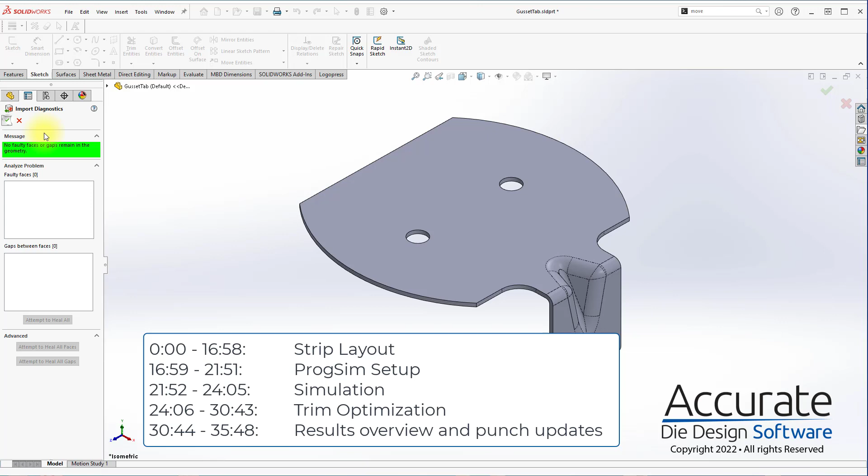Today we're going to create a strip layout for this part here, and we're going to use ProgSim to develop the cutting punches for it. I'll start by saving the part.

We will begin by taking the gusset out entirely. We are just going to use the ProgSim tool's automatic blank development, or the trim optimization, to create the punches for us.

All right, we can go back and name our station marks now.

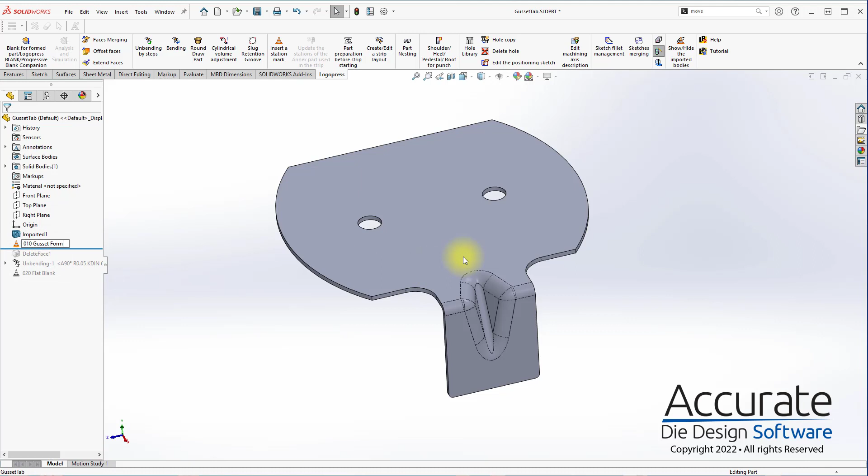Save, and we'll run part preparation. We'll tell it that the bottom side is die side, and that we're going to use this line, the back edge, the center of which to be the origin. Just going to create some reference geometry.

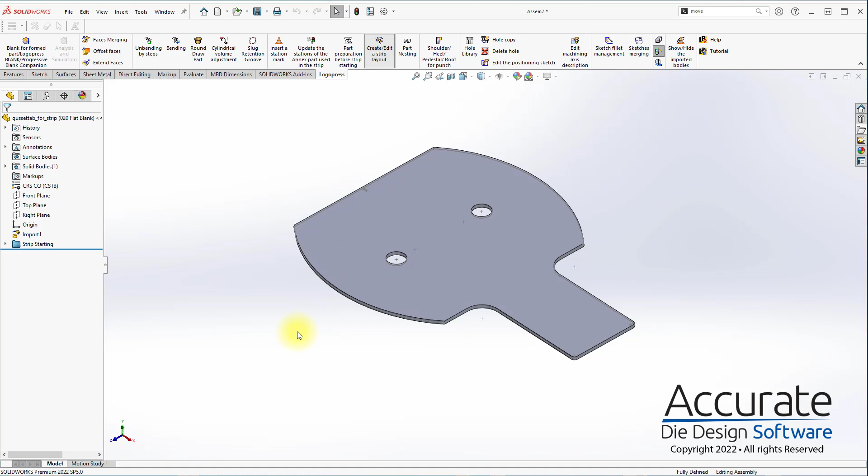And we can run the create/edit strip layout command. It needs a job number, and we need to name the strip itself.

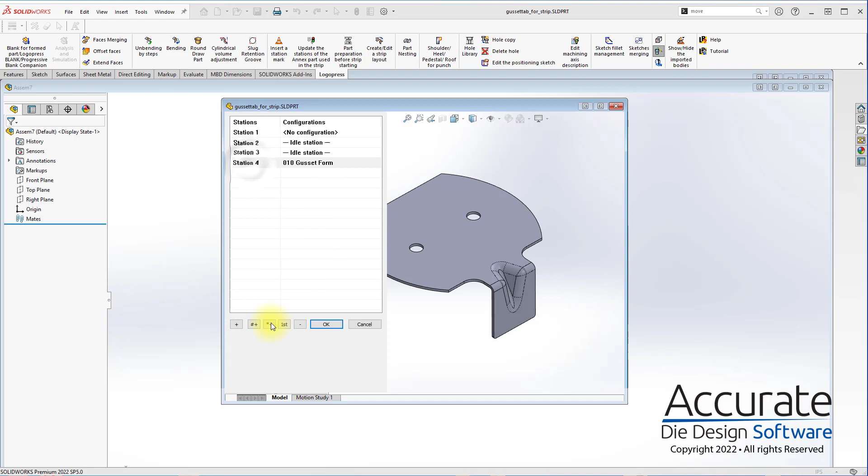We run a single-out, just going to run right to left. It puts in the two configurations that we add, so we're going to have a flat, then two more flats, then our form, and another one. So a total of 5 stations. And we'll save that.

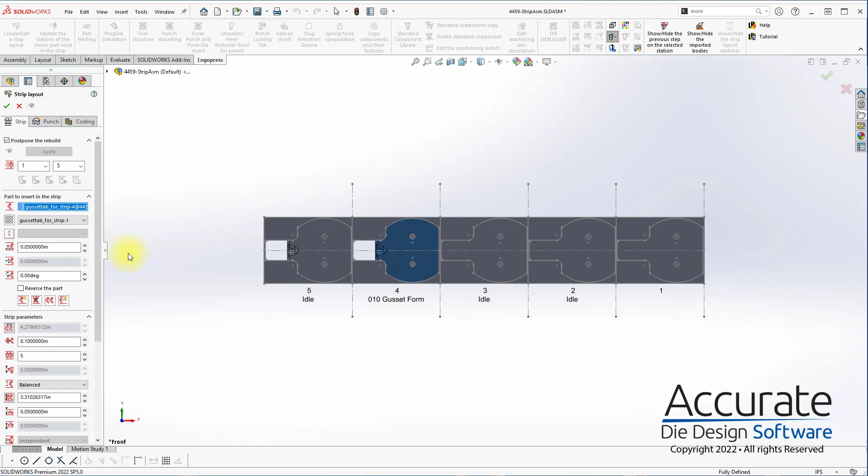Now we're ready to arrange our part. I'll rotate it 90 degrees.

We can adjust the spacing between parts. Give it 150 thousandths if we want, or we could just type in an actual value. Same for the strip width it gets. When it comes to material thickness, we could put in a different value, or just type in directly. I'm also going to nudge this right off the edge just a little bit here, and I will hit apply.

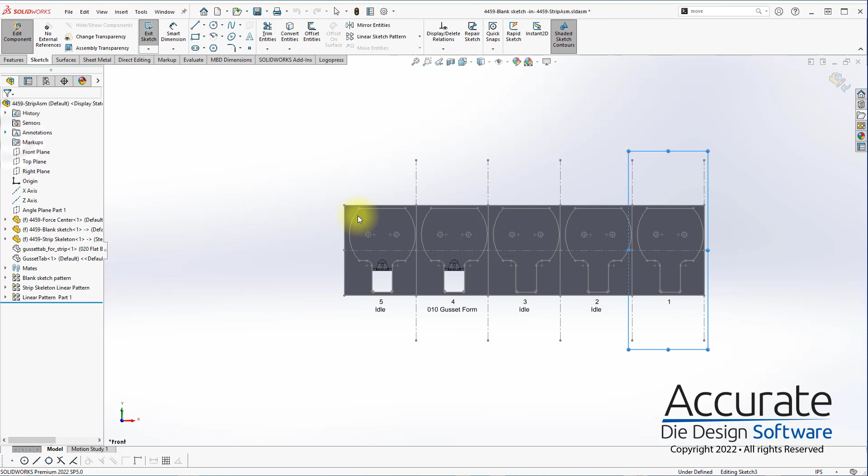Now we're ready to start putting in our punches. I'll start with our punches for pilots. It's asking for points where we want the pilot, but we don't have it where we want it yet, so I'm going to add a sketch as a reference.

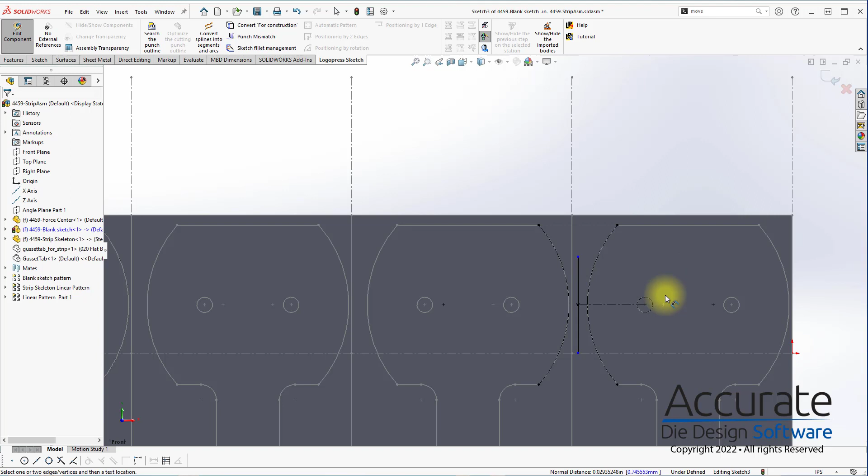I'm going to start by converting some reference geometry here, then we're going to go center of that, and center of that, and I'm going to do a midpoint line out from there. That'll be coincident. This will be... oops. There we go. Now we've got a reference.

We are going to put pilots here, and they are going to be 0.377 inch diameter. Going to hit OK, and it will add those in for us.

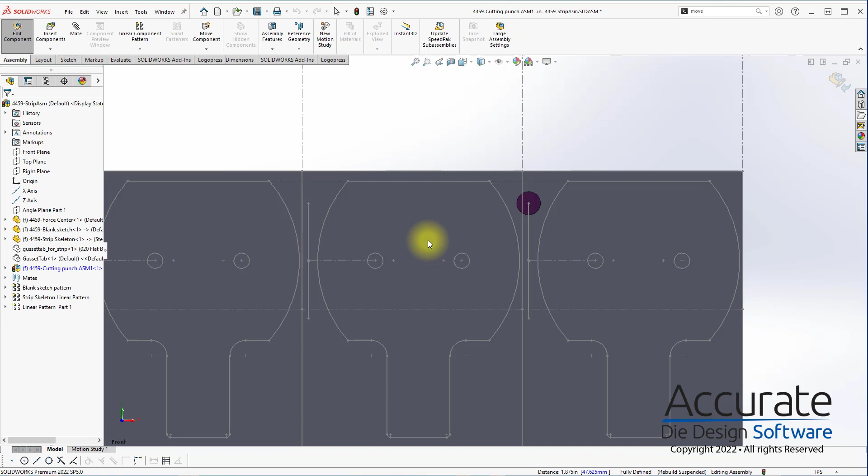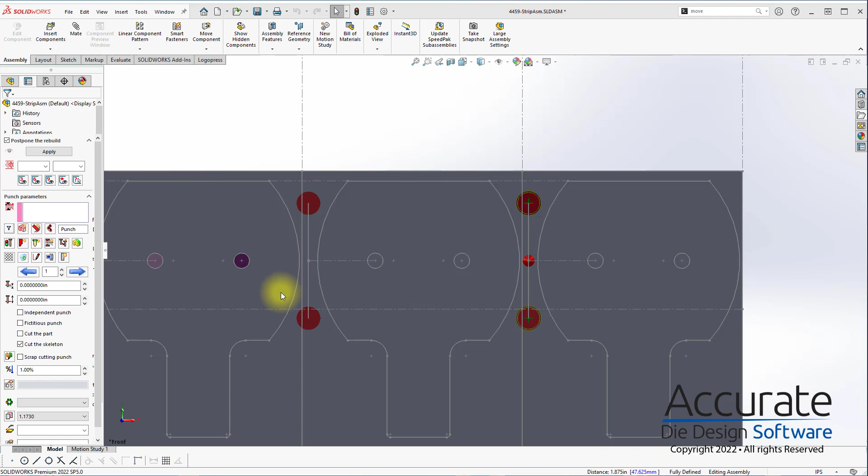Going to add these interior cutting punches here, in the 3rd station. Again, as we saw with the first one, it made an original punch and copied it into the 2nd location. It's going to do the same for these, so that way it'll be mounted together later in our tool, and also shows up as a quantity of 2 in the bill of materials. You can see that here with the colors, the dark original and the light copied.

Going to move on to our next punch here. Throw a rectangle about what we want to do, and then we will make it coincident. Then we can use the search punch outline sketch, it's going to find that whole area. I don't want this redundant sketch here though, so I'm going to drag this back and then back onto it.

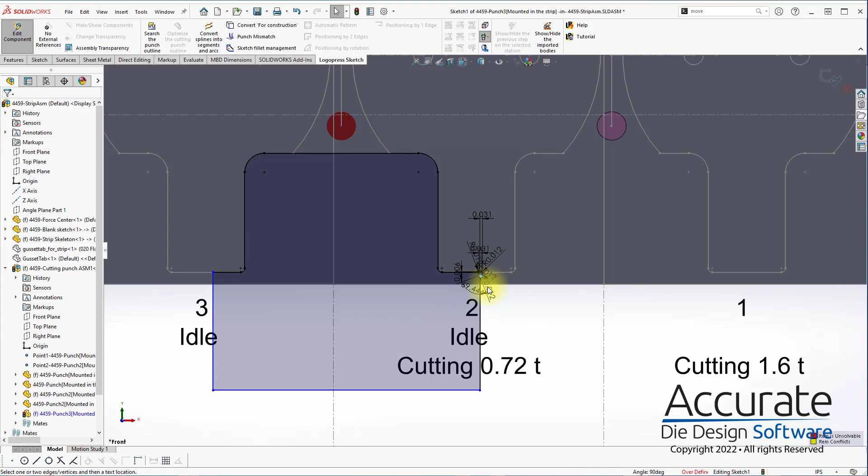Next thing we want is a mismatch here, French stop, the cutting side and the reference side. It puts all that in for us automatically. We want our radius on this end, and 100 thou on the back. And add some reference geometry here.

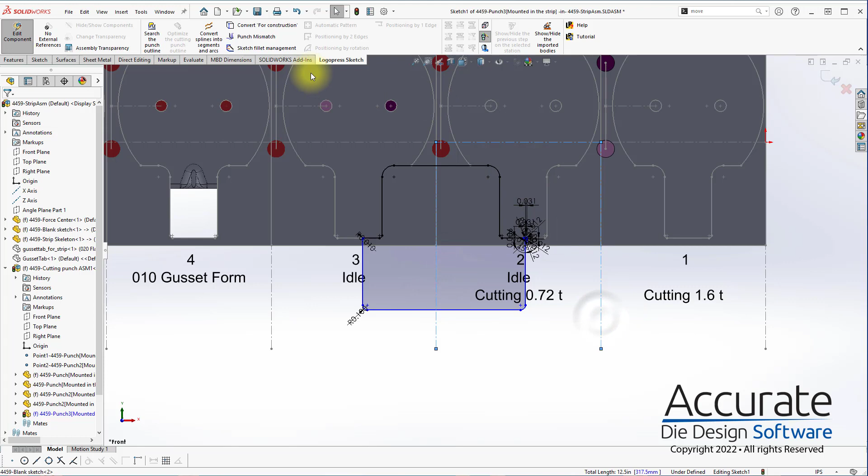That's one punch down. I'll get another one going here in a second.

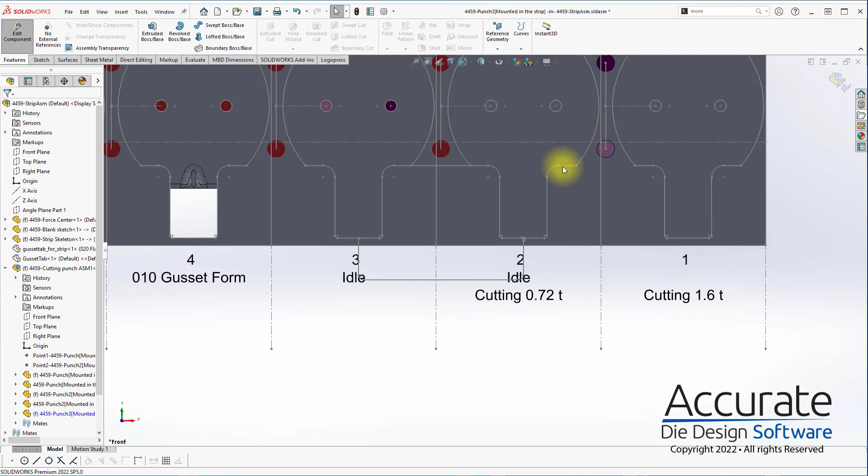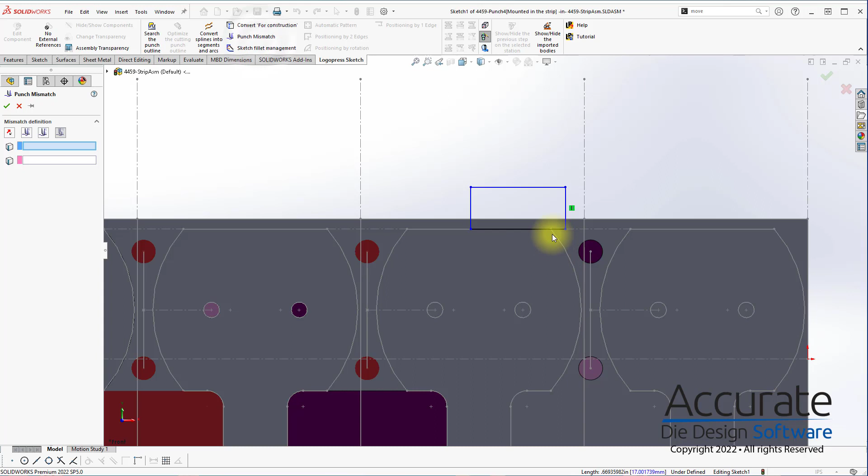Just saying, draw a rectangle around the edge we want to capture, search the punch outline, and then we can modify, drag that out, do our mismatch. Put 100 thou on the back since it's already 100, and we'll add some more reference geometry.

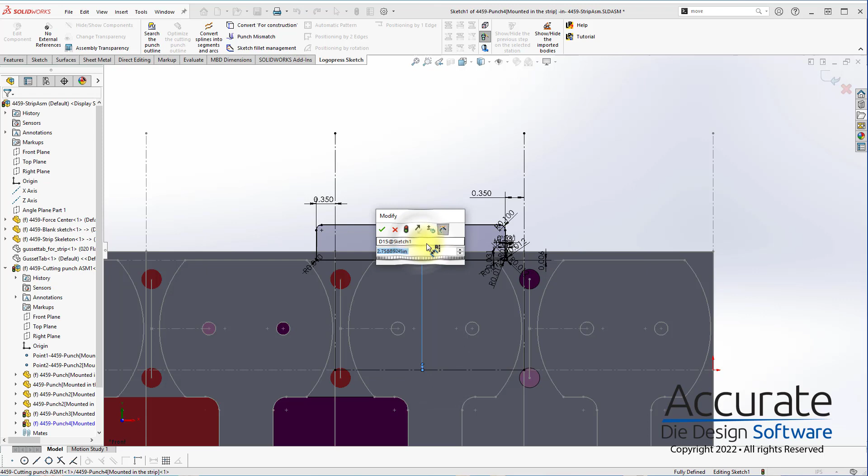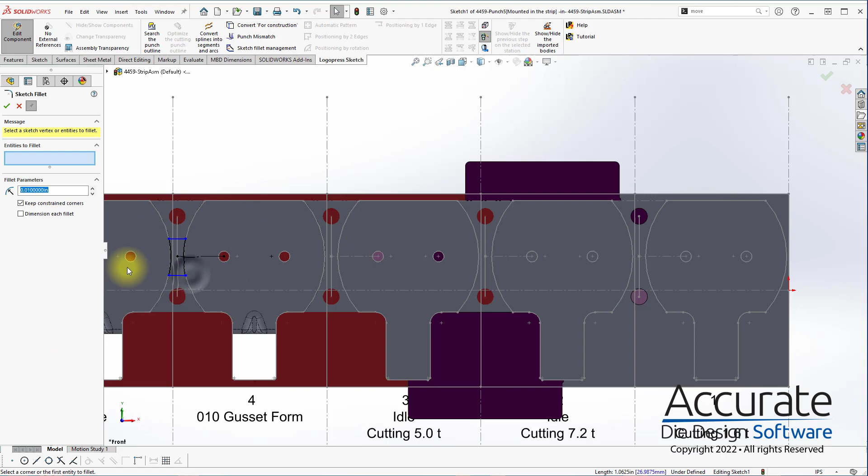And one last cutoff punch here. Make this symmetric, I'll add a dimension. There we go.

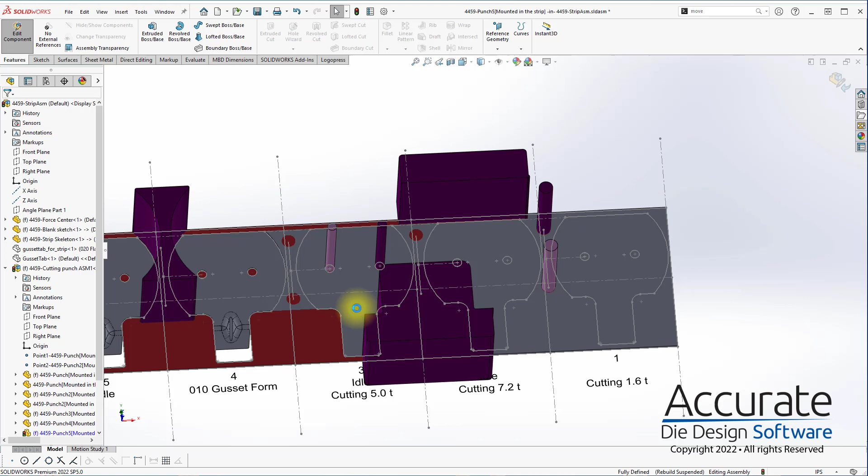You can see on the red preview here that our mismatches are lining up. All right, we've got all our cutting done. We're going to go ahead and apply.

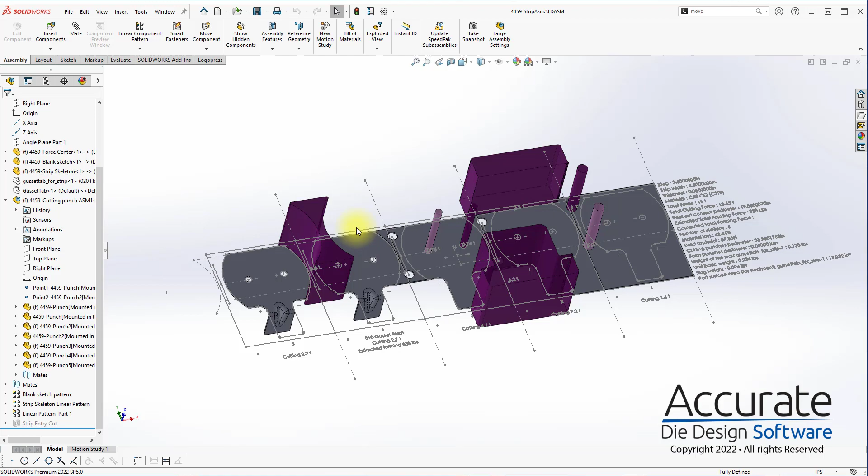Alrighty, we'll go ahead and save. Now we're going to start working on some more punches here. Show at the bottom side.

We're going to pick the edge that we want first, and then we're going to pick everything else. And then we're going to draw a sketch.

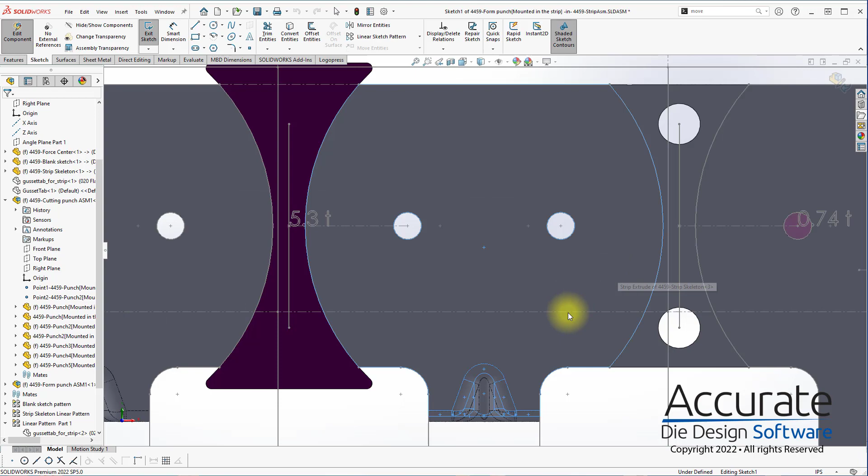I want to use this edge as a reference, but I don't want to maintain that type of reference, so I'm going to make that link first, but then I'm going to come in and use my reference geometry here. And before that can move, I'm going to stick a distance on there. So that is now essentially the same as being collinear, but it won't update with it if it ever moves. So it just happens to be on edge right now.

I'm going to keep this within the width of this here. There we go. Oops.

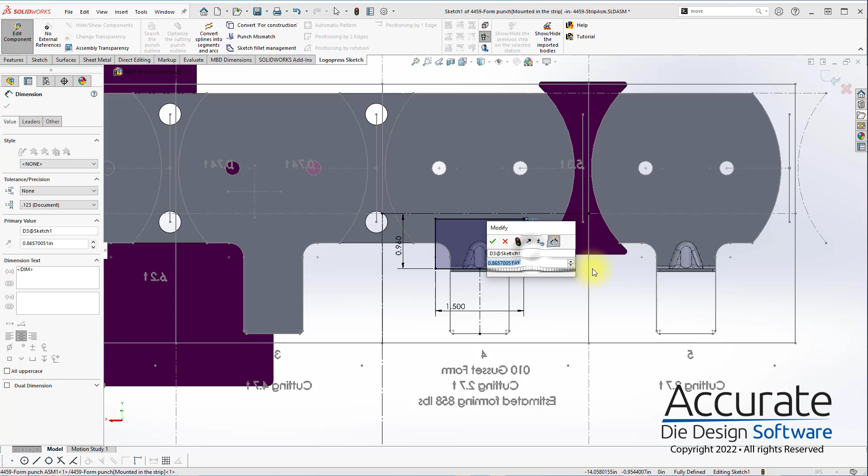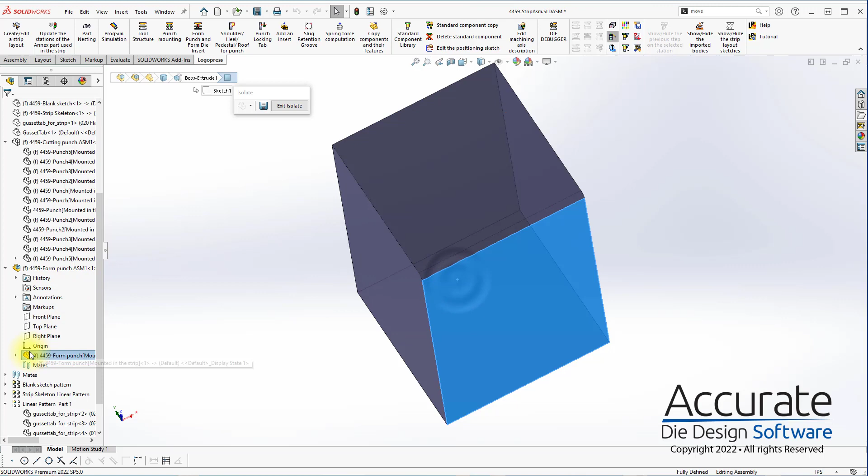All right, so this is going to make our punch here, but as you will see, it has not cut the gusset at all. So I'm going to edit the punch, still in the context here. Since I selected the surface, they're all on there, so I'm going to use that surface body with the cut with surface command and cut that off. And now we have a gusset.

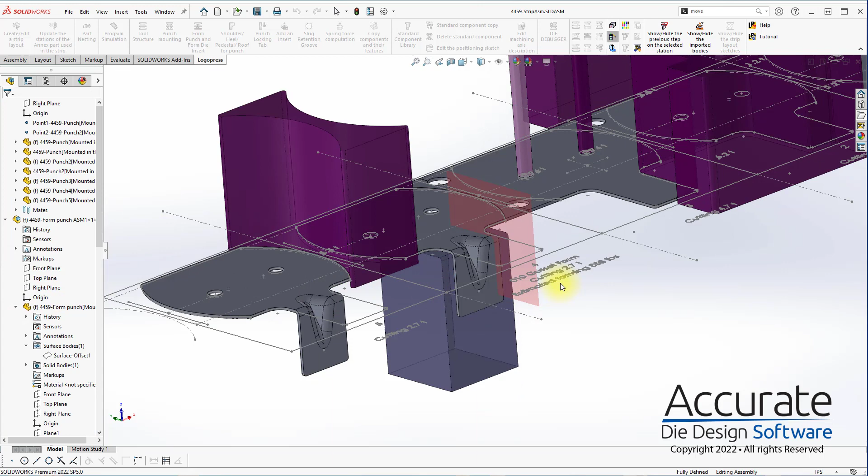Do more or less the same thing from the top side here. We're going to pick one edge to be our bend radius as a 2D punch, and then we're going to pick all of them as our cutting surfaces. And then we're going to draw our outline again. Get our reference to center our sub.

And one last construction. I want.

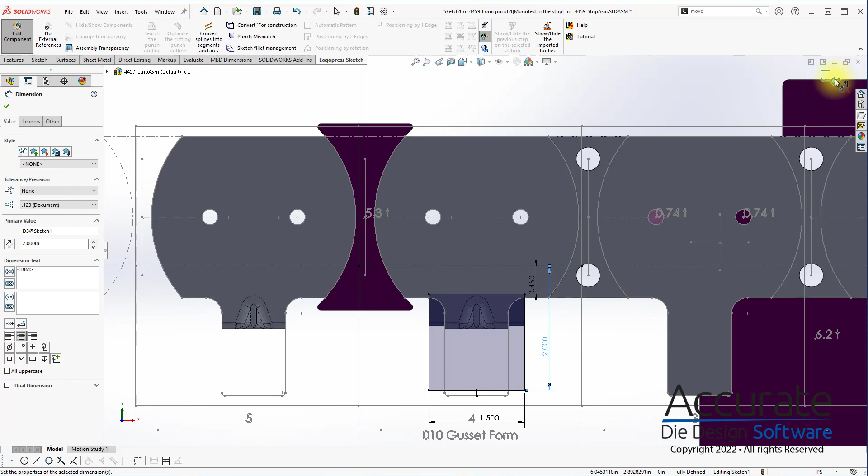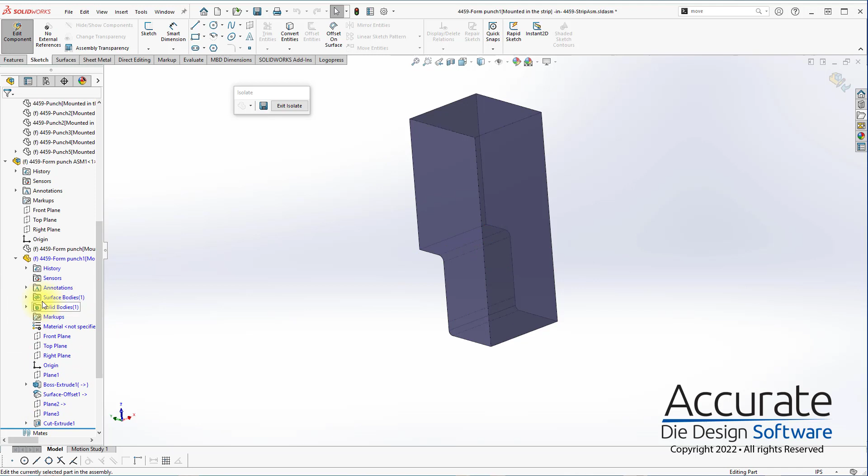So again, this is creating just a basic 2D white punch without any gusset on it, and then we are going to edit it and use the surface that is there. This time the material is not there, so we need to add material. So what we're going to do is sketch on the top of the part and draw a rectangle.

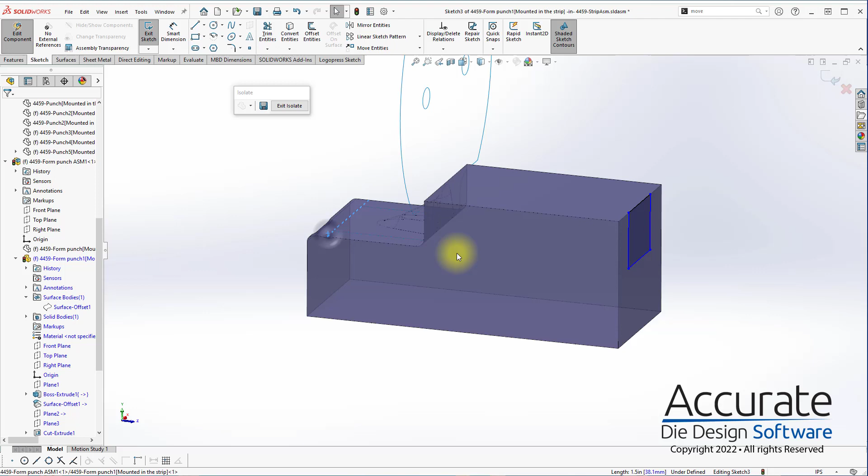I'm going to make this edge coincident, and just make sure it's wide enough for those gusset faces right here. I'm just kind of looking through and getting that in there. I could fix these or lock them down or something.

We're going to extrude up to surface. So we're going to pick that surface. Oops, we're going to go that way. Oops, that way, and go up to surface. Come in and grab this surface here.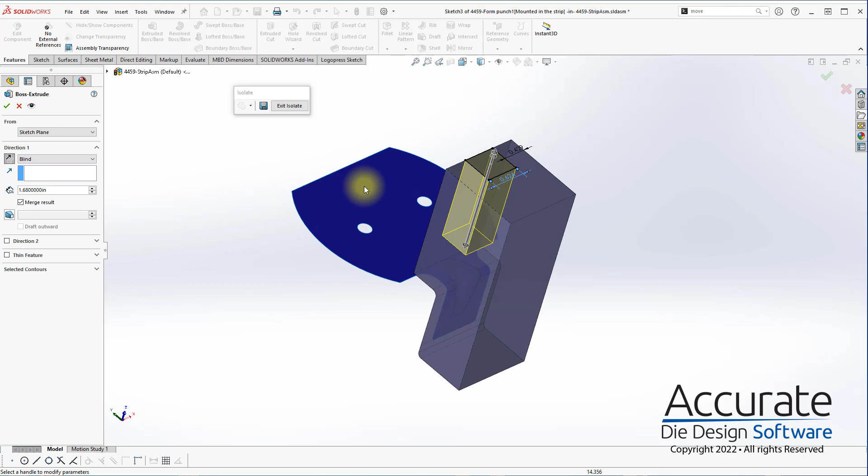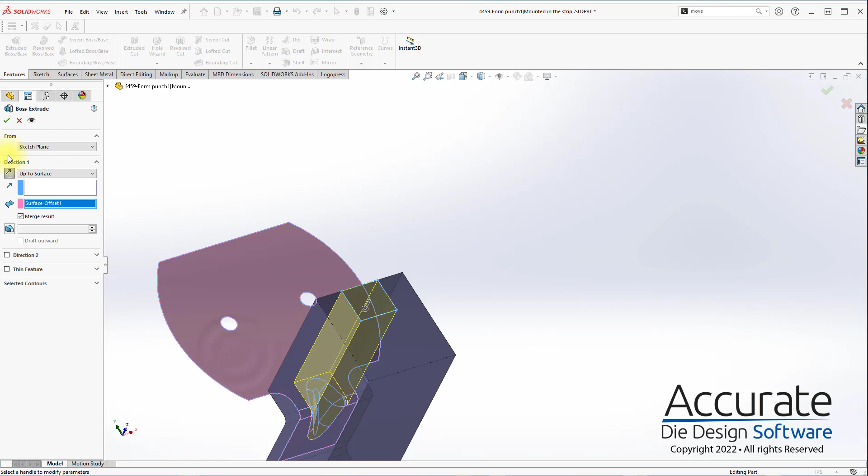Oh yeah, I can't do that in a strip context here, I always forget that. So I get out of this, exit isolate. And we take a sketch we created, we can extrude, we can do up to surface. There we go, and we can hide our surface again. There's our gusset.

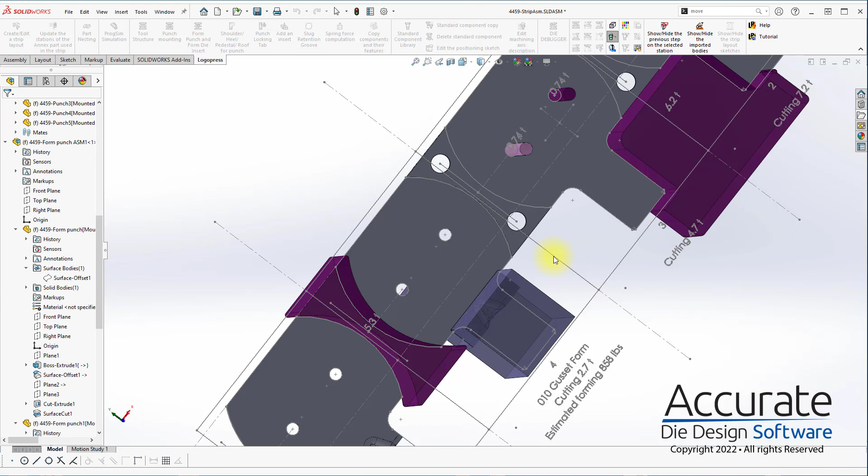And we're going to use the form punch command one last time to make our last piece of geometry, our pressure pad right here. And we just need it somewhere in here to hold this down for us.

All right, pressure pad. Done.

Oh, I was going to change these. You can go back in to edit these just so you know.

Just going to give it some color just so they're easier for picking them up for the die simulation here.

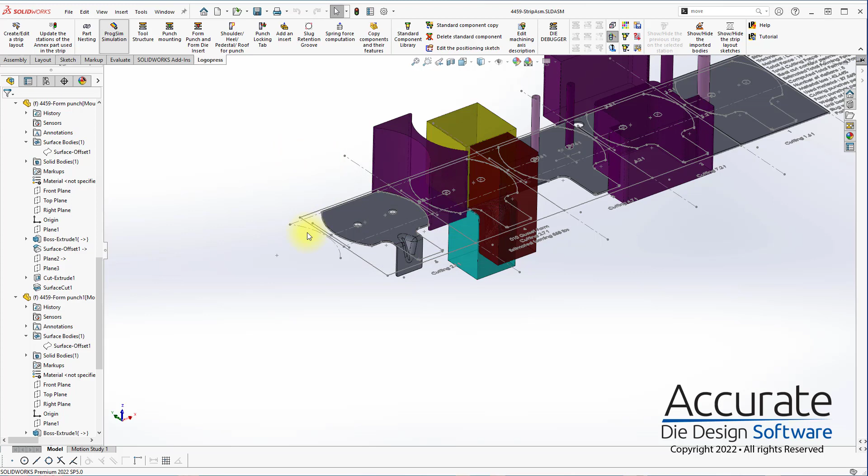Okay, we are ready to simulate. I open the ProgSim tool. It's going to start loading in a lot of the data here. It does pretty well at guessing what we want, but we still need to go through and double check that it has done what we wanted.

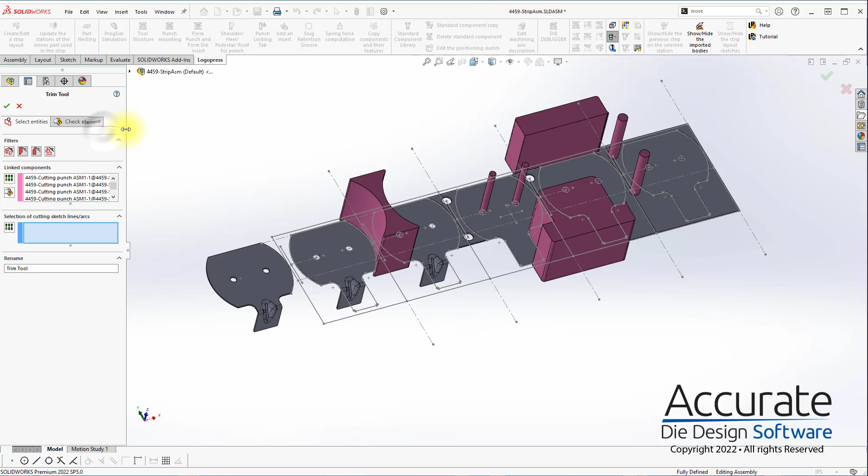Start with the trim tool. It's picked up all our punches. Show up in the check element, and we're good with that.

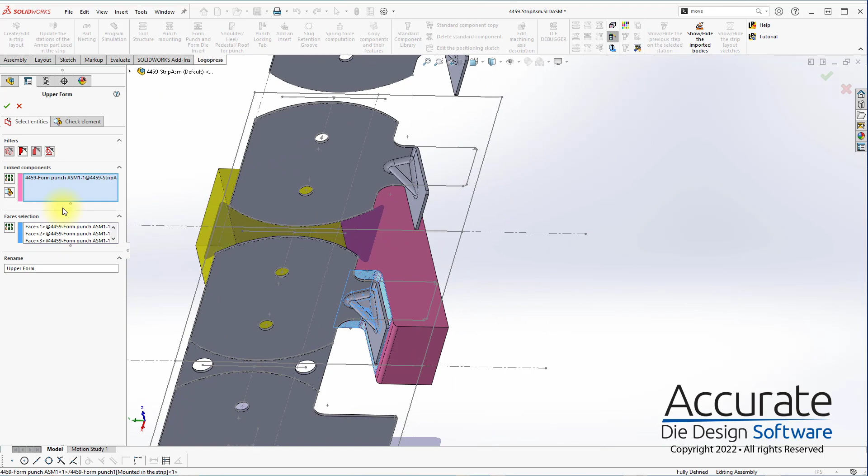Go back, move on down the list. Next one's the upper form. It's picked up both of these parts, I created them both with the form punch command. They're above the strip, so it makes sense. But we do not want our pressure pad to be a form tool. We are going to grab the last few faces down on the bottom here.

And you can check and look at what we got and see that it is indeed what we want.

Keep on going down, next is the upper lifter. Accept the name and then look normal to draw a big floating lifter across the top here. The only thing is we need to just watch out for the gusset, so really the only thing is just don't touch this. Other than that, nothing wrong with having more because it's just going to support more material and keep it nice for the simulation. We're on both sides of the center line, so we are good.

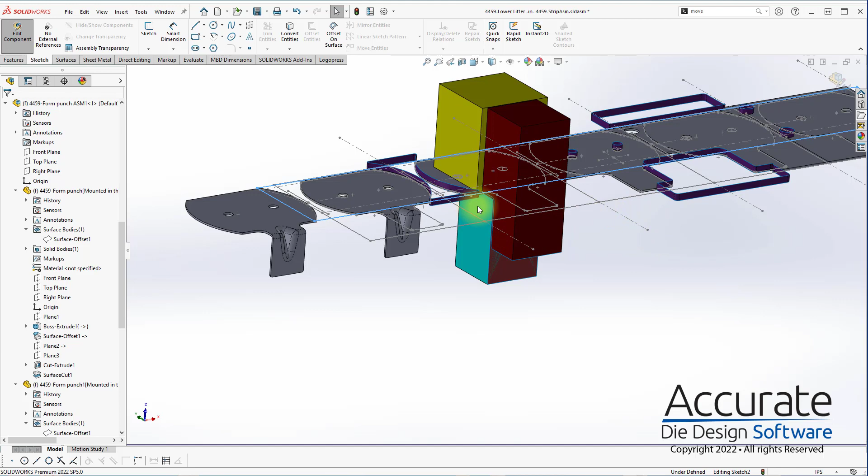Next is the lower form. It's picked up the lower form and its faces. Confirm, and we like it. The lower lifter is the same as the upper lifter, so we just made that and we know it's good.

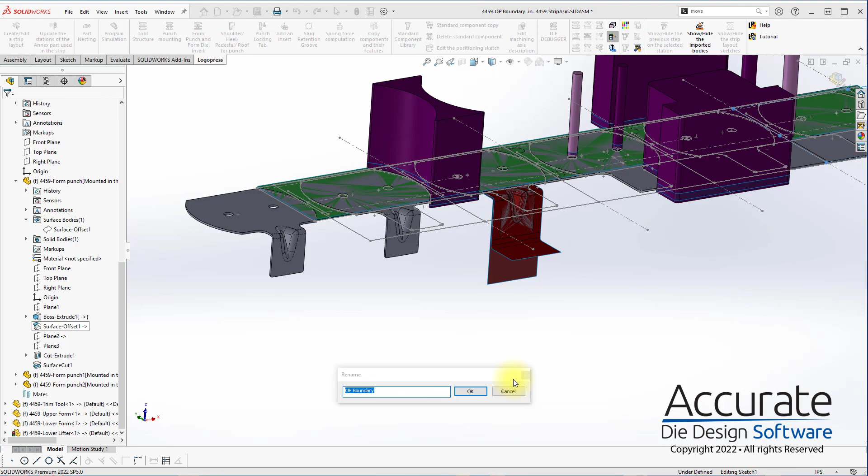Next is the OP boundary. Accept the name, and then look at the drawing. We're just trying to divide the part one from the next. What my goal here is to try and include some of the skeleton here. I need to go all the way out to the edge because this is going to define the shape of, or the width of, our material. But I'm going to come all the way into this center line here.

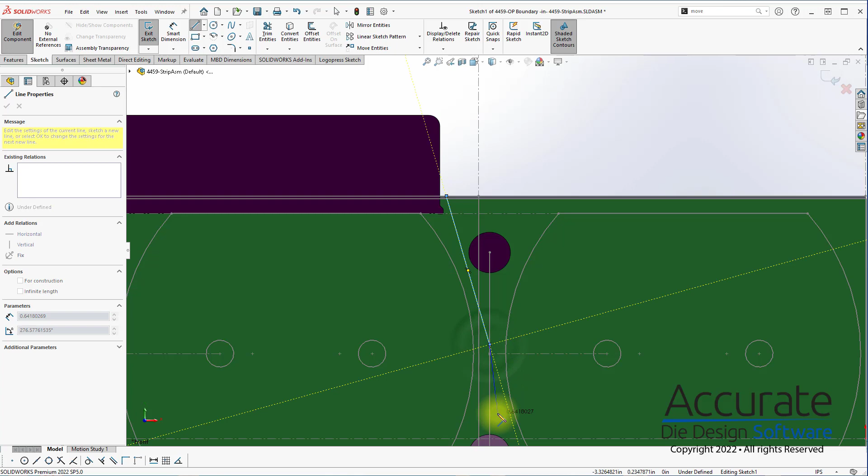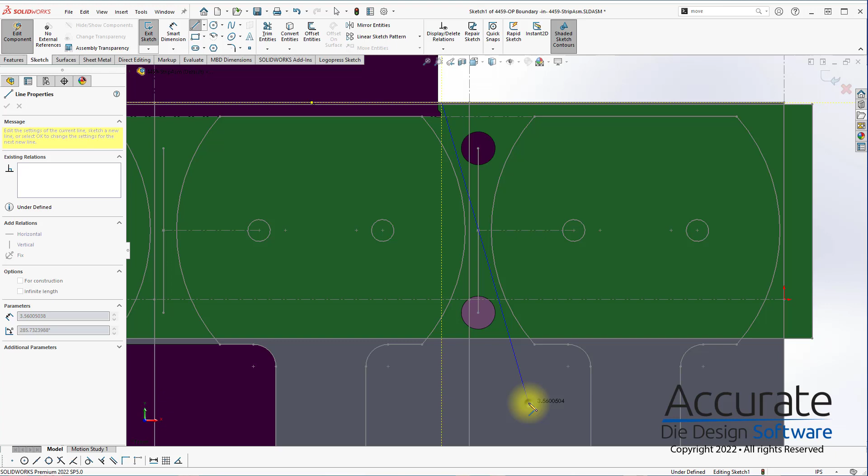And the goal, my only goal here is I'm trying to put one lifter or one pilot in one and one in the other. I think I can actually just come all the way across with this. Go away, or not. Close enough, there we go. So that's fully divided the part.

And I can draw that in any station, and now it's patterned it all the way down. Pick our pilot holes, I'm going to hold Control, pick the edges. It's going to pick up on the pattern of the edge until it gets recognized as a cutting punch, so I just do that for both of those, and it picks up the second one.

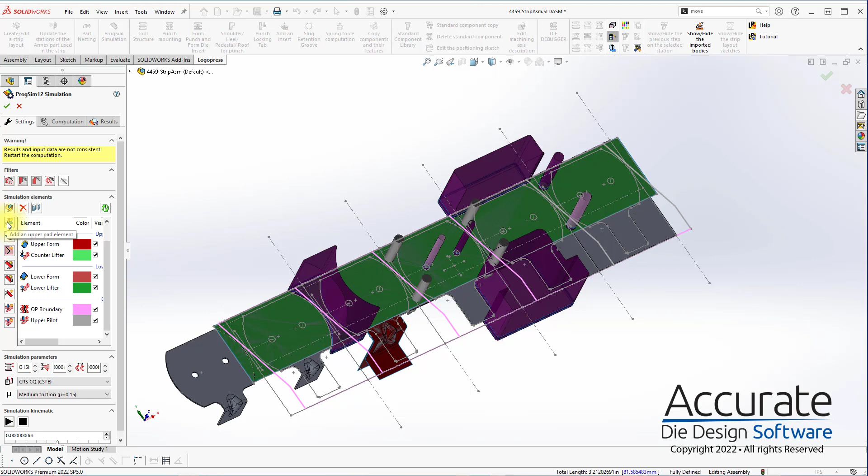And the last thing we need here is our pressure pad. I tell it this block did not pick up the face, I'm going to pick through the hole here. So I'll tell it there's 2 inches of stroke, initial force of 2,000 pounds, and hit confirm.

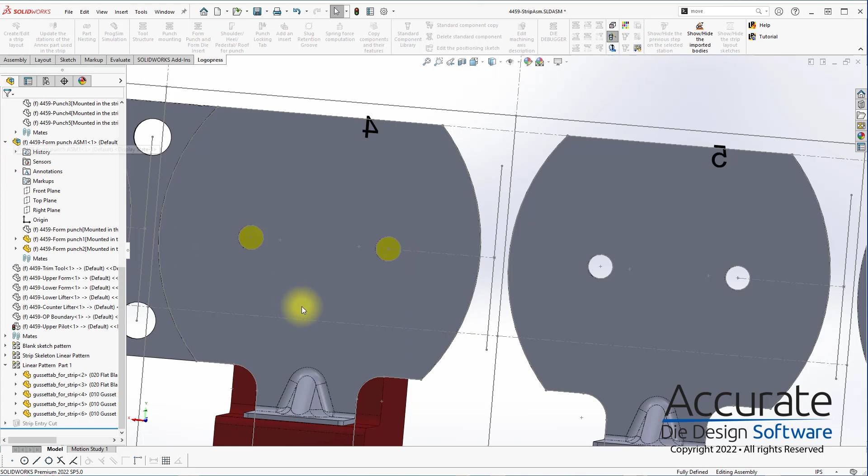We've got our basic strip stuff set up here. Go down to the bottom, get the rest of our stroke. The lifter is going to move the same as the pad, 2 inches, and we're going to make the lower lifter 2 inches as well, just for the sake of convenience. The overall stroke is going to be 8 inches.

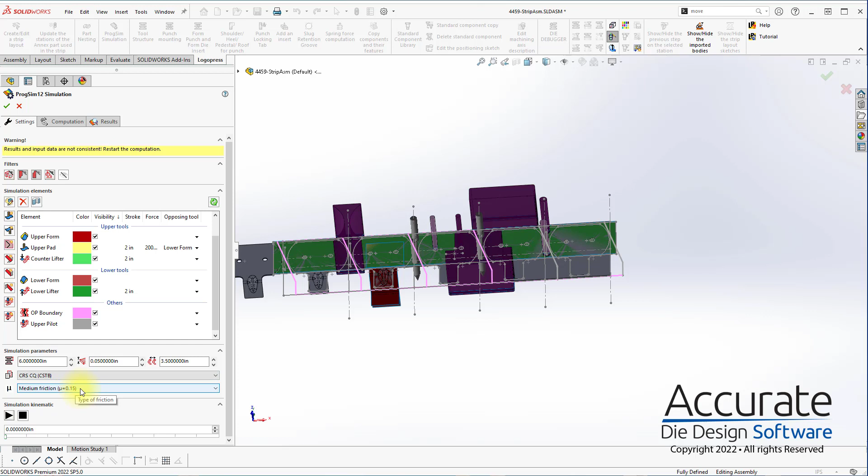No, we can make it even shorter, we can make it 6. Thickness of the part is indeed 50 thousandths, and the progression of the part is indeed 3.5. Got our cold roll material selected, and we're going to use the medium default friction. We can, from here, go ahead and hit compute to make sure that our simulation makes sense. And then once we know that it's working, we're going to set it up to optimize the cutting punches.

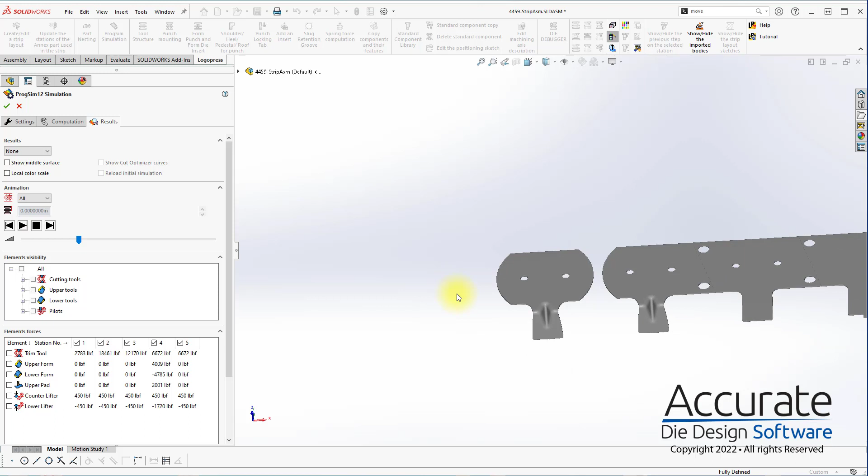All right, so simulation worked. So we're going to come over to the computation tab, and we are now going to ask it to run the cut optimizer.

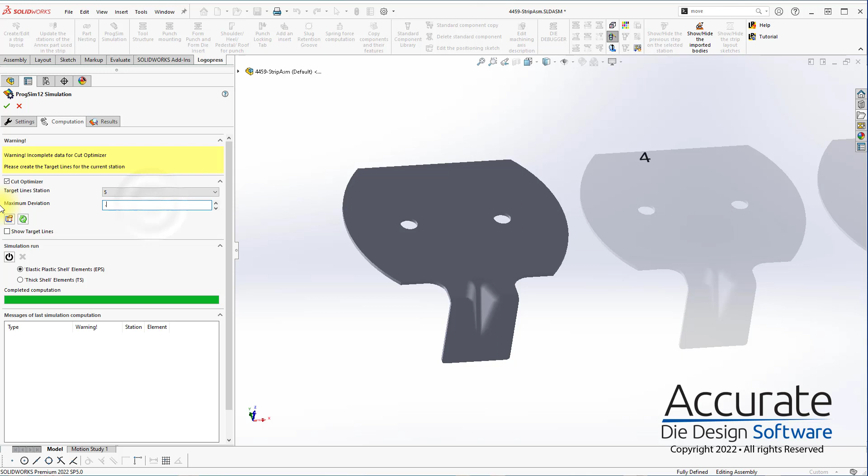Use this 5th tab here. We're going to ask it to go within 10 thousandths. It probably even goes closer. Let's ask for 7 thousandths. But we're not going to ask for it to optimize the whole part. We're just going to optimize the tab because the rest of it's being carried and it's being cut and not really being developed. So it's only this tab part that matters.

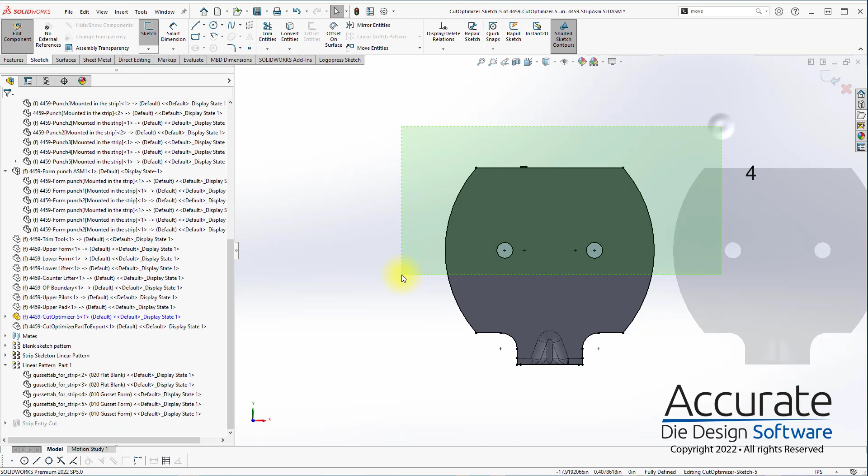So it's identified the outline. I'm going to create a sketch. I'm going to come in here and grab all this extra stuff, delete that. And then we're also going to drag this back from the edge a little bit, which helps the simulation. So now we've got the edge of the part defined here, and we're going to tell it please get within 7 thousandths of that. So we're going to go ahead and launch the computation again.

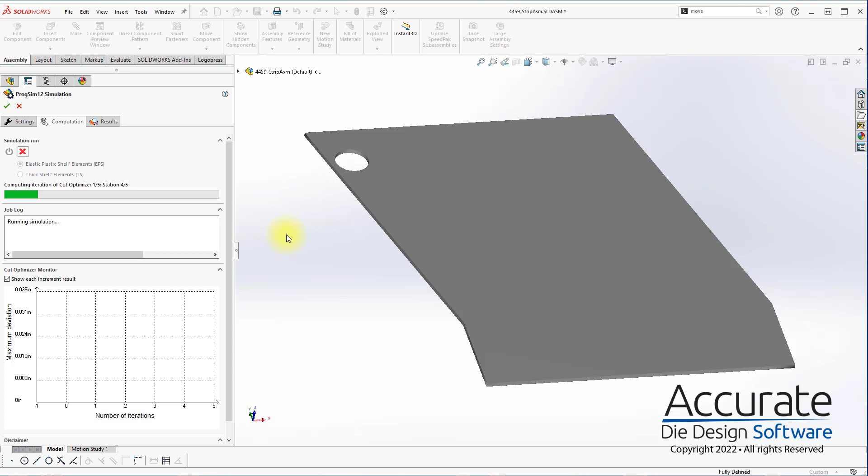Just run through basically the same simulation over again. It's going to compare to that line we gave it now.

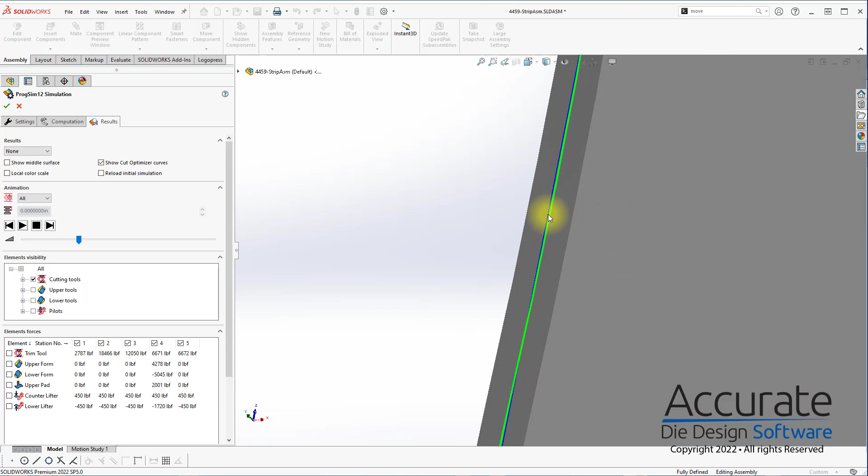Alrighty, so we can see the cutting punch that it has suggested, and given the green line here, we're now fully within 7 thousandths. Let me click on it. Maybe not. Anyhow...

So we can take a look at the formability if we like. It's indeed a formable part. Spring back here, got 6 thousandths worth of spring back.

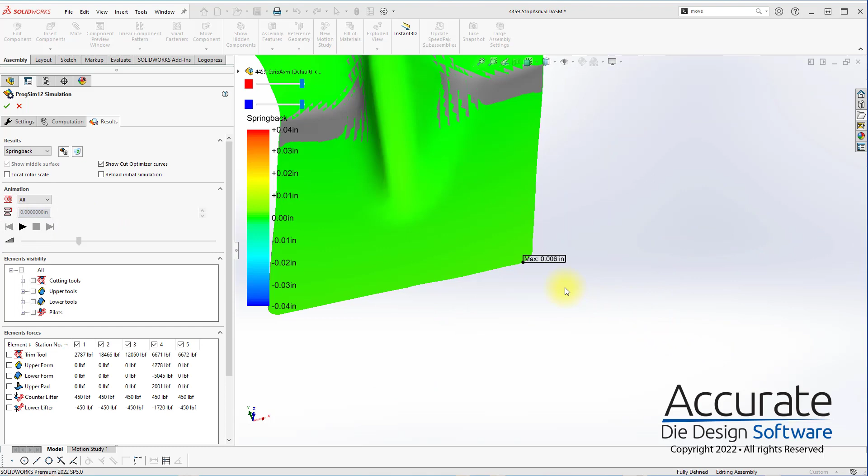So now the next step is we've got this cutting geometry in our simulation. We need to make that back into our form punch here. That is basically just a polyline mesh line that was made for that, and it is not nice geometry that you want to cut. So we're going to go into this punch here.

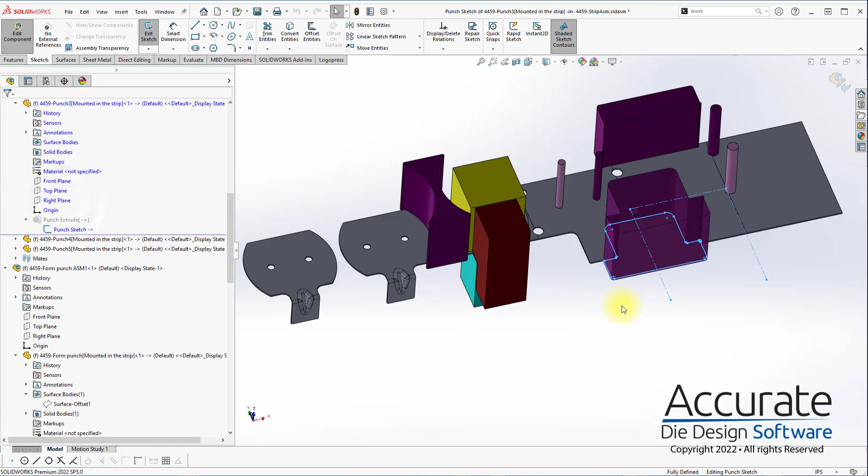Logopress has a tool called Optimize the Cutting Punch Outline. And it's going to bring in that polyline that was used to cut the part in the simulation. And it is just a line right here. This is not a line. It's not even really a spline. It's just a...

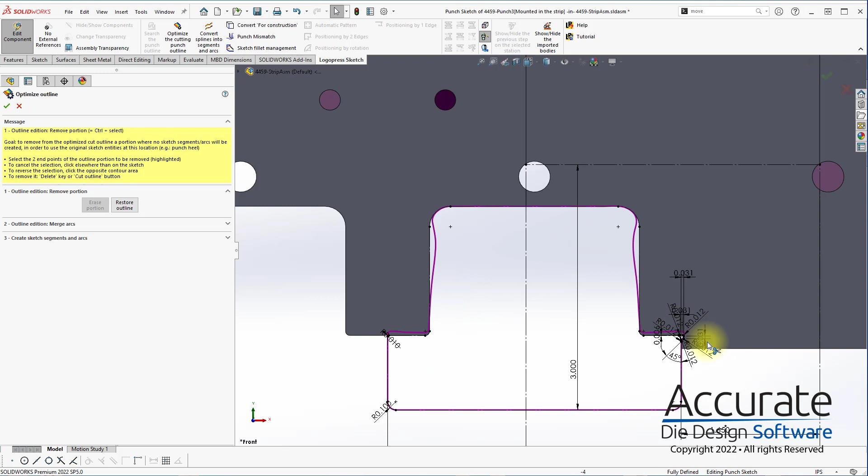So, but what it's saying is we're use this whole thing. Do you want to keep it all, or do you want to retain part of my old geometry? So I'm going to click here and tell it to delete all of this. We're going to erase that portion, and it leaves the front portion all in the magenta color of the line.

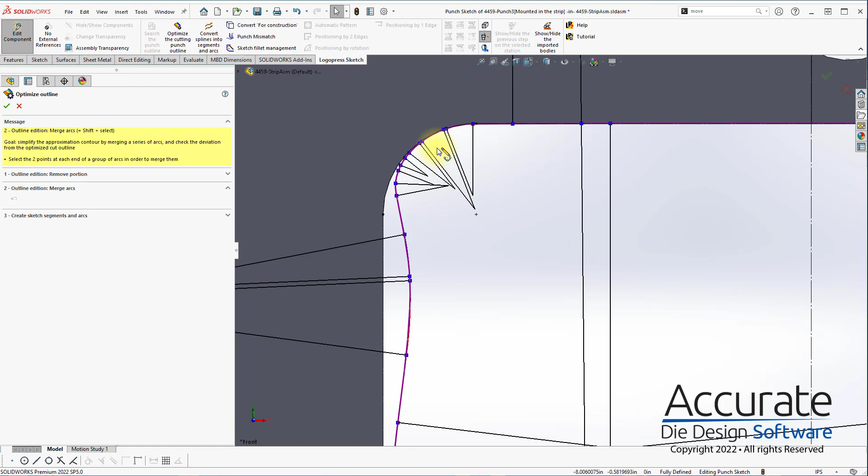The next thing we can do here is go to the outline merge arcs command. It's going to try to divide this down into lines and arcs. Each of these is an arc with maybe space between it or not, that's tangent to the next arc. The flat, an arc, a flat, an arc, and each of the triangles is kind of the radius of the arc that it's on. So we can kind of look at these and try to decide if we like what it's come up with.

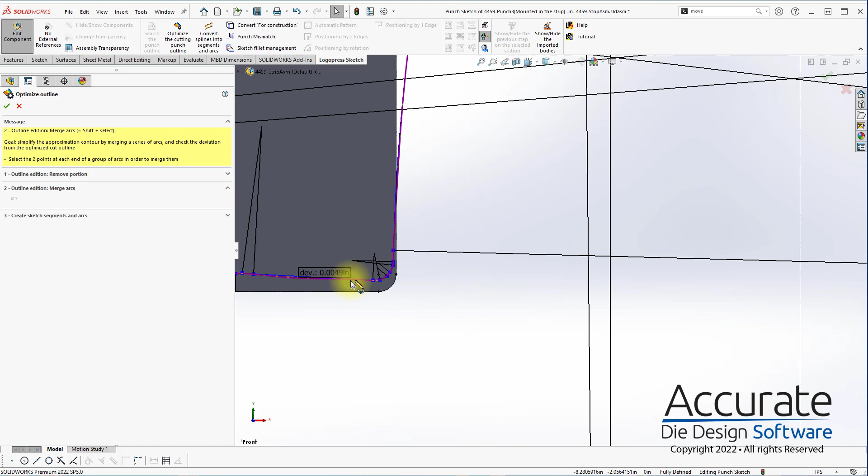We're going to try to merge some of this, try to make a little less choppy outline. Most of what it's come up with is pretty good. I'm not going to try to merge too much of this here. But at the end of the day, you can still just come in with SolidWorks sketch entities and change what you like. But most of this is pretty good. So I'm just going to go ahead and hit OK. And it's going to make this into actual sketch elements now.

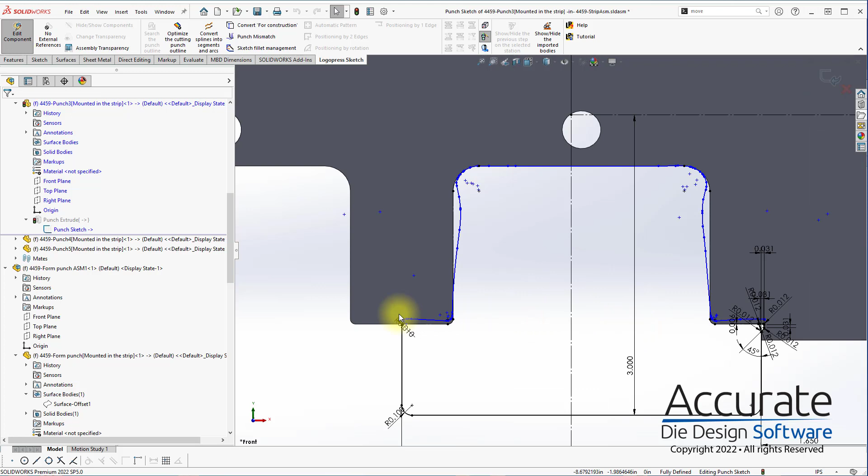All right, and the last thing we need to do is connect this back up. So I'm going to window that, get rid of that, and I'm going to get rid of that, and I'm going to put our 10 thousandths fillet back on the edge here.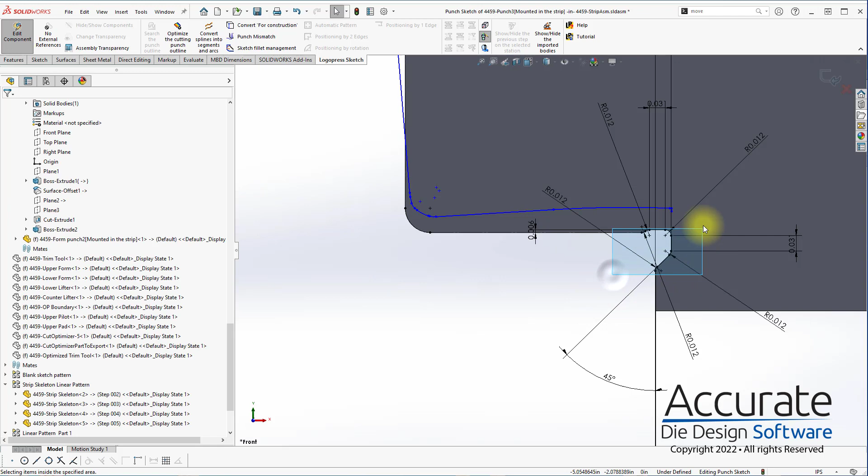And we're going to come over here, and I'm going to wipe out all of this for similar purposes. Oh, can't be in the fillet command. Wipe out all of that because we don't want that anymore. And we'll wipe out that.

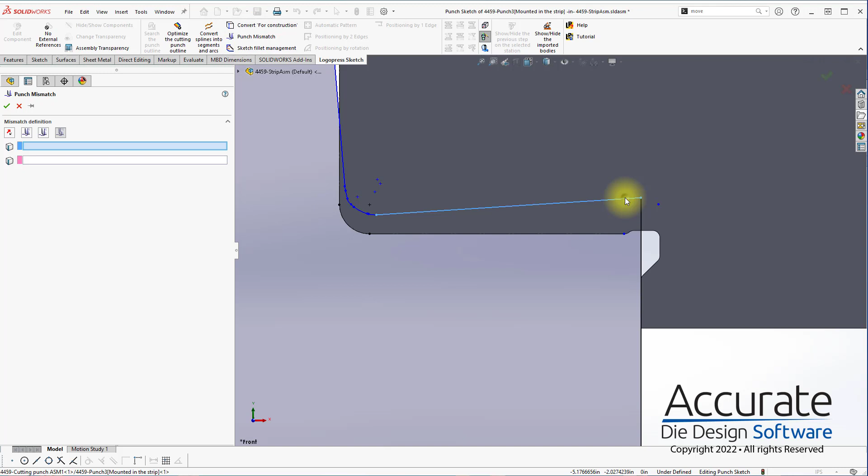And we can do the same with the punch mismatch command. Maybe not. Let's try that again. There we go. Just got our mismatch back on there.

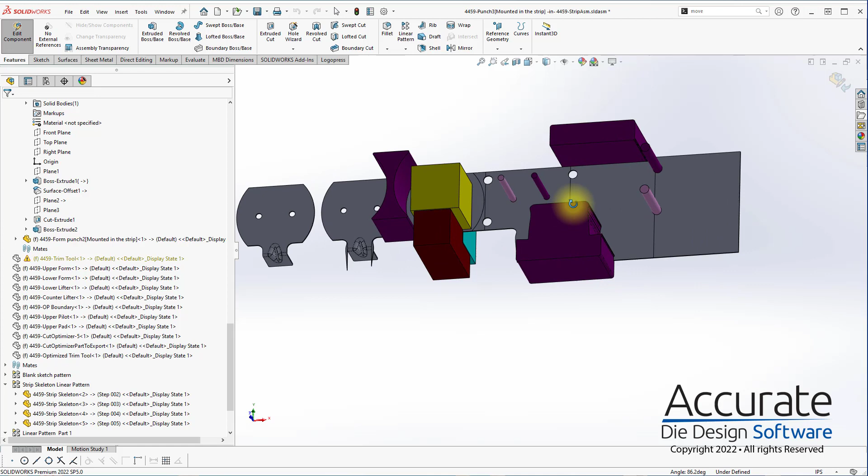So we can go attempt to simulate that punch again or not if we like. The only other thing we might want to do here is I'm going to hide this punch. We're going to get rid of these extra bodies here. We're going to edit the skeleton.

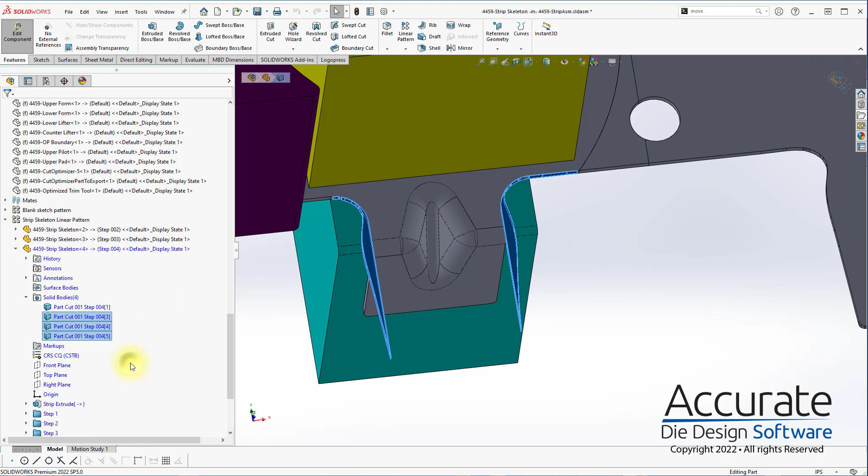And we are going to find these two bodies that we want to get rid of. This one and this one. And maybe that one too. I'm going to delete that one too. And we're going to use the delete bodies command and delete it. And that's now at the bottom.

And then we're going to use the Logopress one, unsuppress on the following stations. And it's now gone on the rest of them. There we go. Nice, pretty strip. And we'll save that. And we're done.